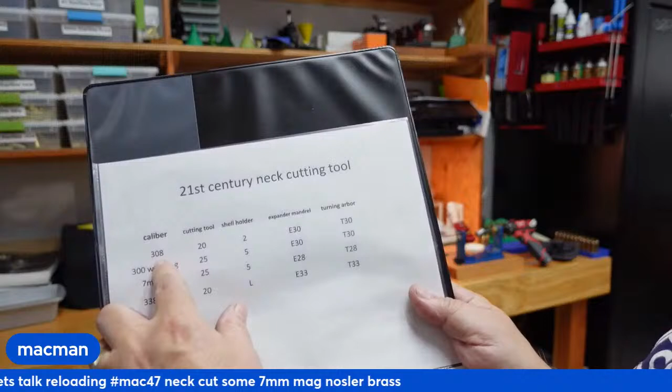From the 21st Century site, so I cut at the moment, I do 308, 300 Win Mag, 7mm Mag, and 338 Lapua. So the cutting tools, it's the same cutting tool for 338 and 308, so it's got the same angle, so I only need one cutting tool there.

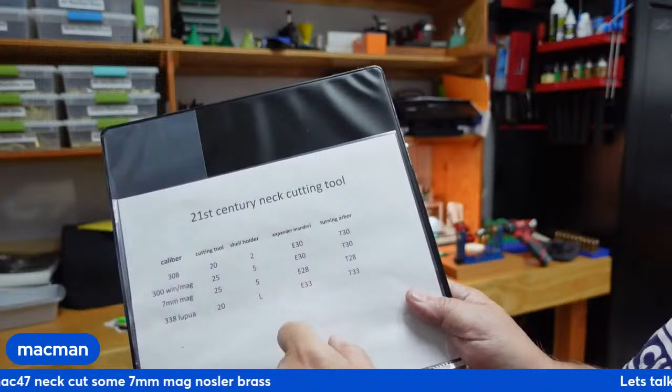And it's the same for 300 Win Mag and 7mm Mag, they use the 25 cutting tool. The shell holder, which is the chunky thing - so it's a number 2 for 308, a number 5 for 7mm and 300 Win Mag, and a large for the 338. Hopefully you can see that okay.

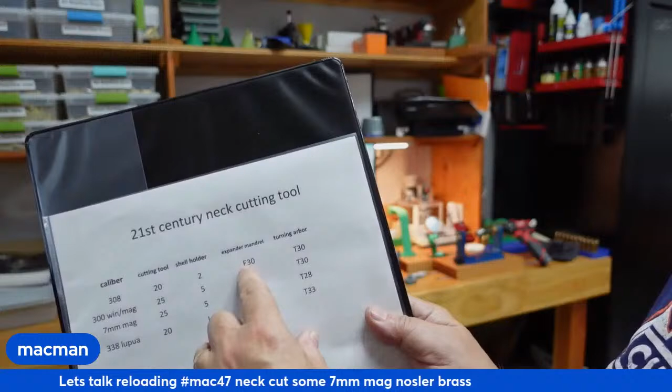So an expander mandrel - the expander mandrel is what we're going to push down inside the neck. What it does is it takes any roughness or any burrs off the inside of the brass, and it expands it to the exact size for the turning arbor. And you can see all the numbers match up, E30 for expander, T30 for turning arbor.

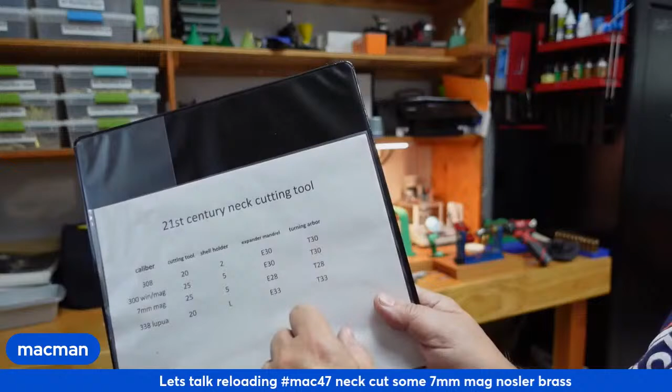So you need 2 arbors, one to go in the machine that it runs on and one to expand it out. So it's the 308 and 300 Win Mag, both 30 cal, so they're going to use the same mandrels and arbors. 7mm is 28 and 28, and obviously the 338 Lapua is a bigger one as well.

So because I'm only doing these sizes, I don't need too many parts, but I do like to keep it all on a bit of paper in a file, and it tells you exactly what you need. And then you can download the chart from the 21st Century website, which runs through all the calibers, and it tells you the cutting tool, shell holder, the driver, everything you're going to need. It tells you there with all the numbers, which I just keep for reference.

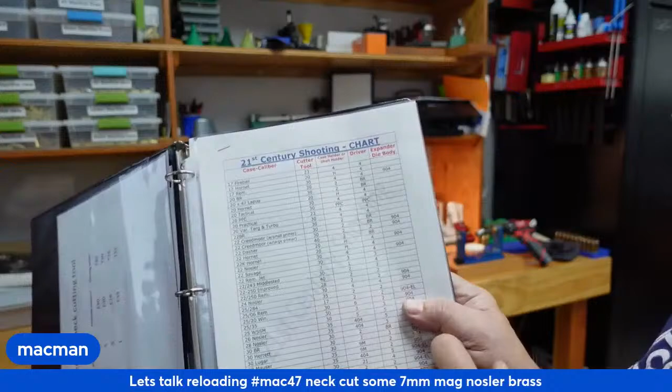So it's always good to keep the list of everything like that - saves going to the website every time.

So over here, you can see the turning lathe is set up. We've got the gauge back here for doing the run out, micrometer there, and I've got some pieces of brass ready to go. So we're going to go over onto the...

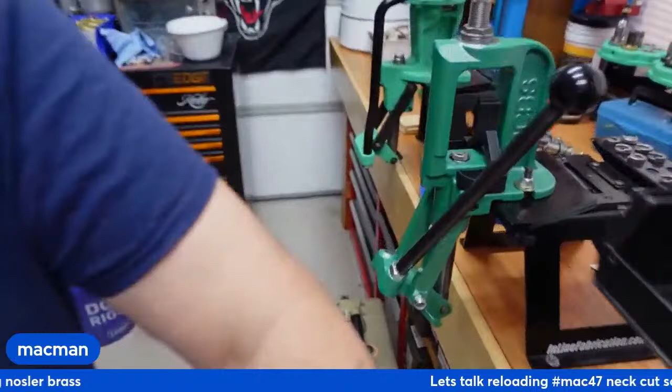RCBS first, because we're going to have to expand the necks and clean them up to make sure everything's good before we run them through the neck lathe.

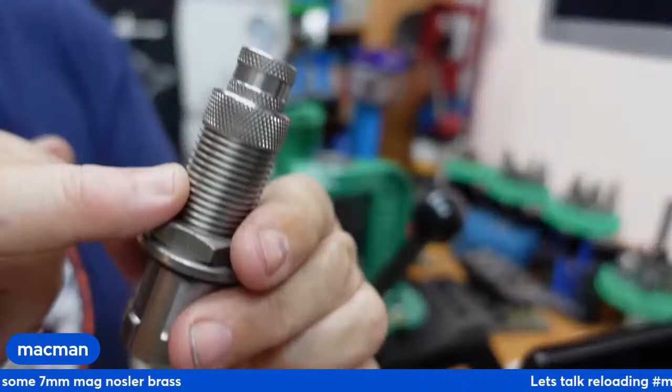So they come as like a die holder, which you can unscrew, and there is the actual expander mandrel. You can see on the back there.

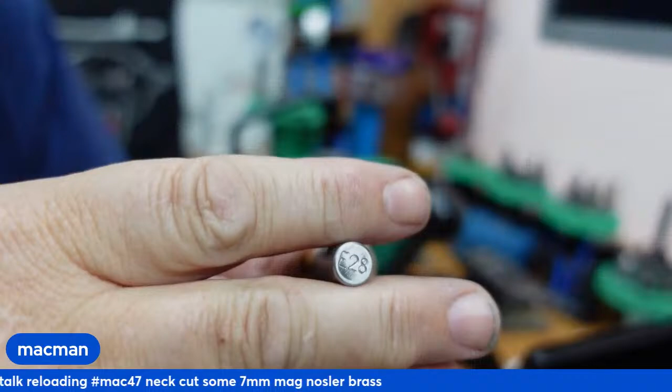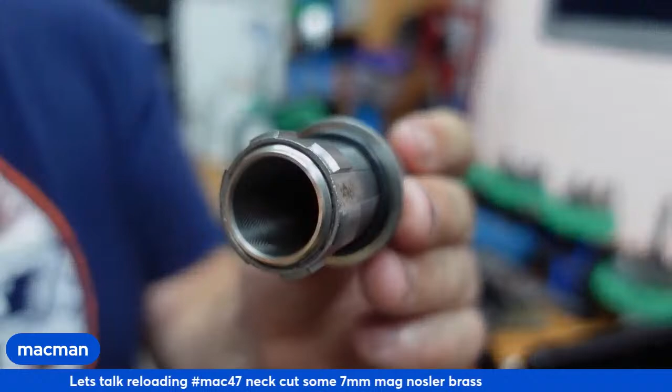Clean that off a bit. So E28, you can see that, they're not focusing very well. There you go, E28. So that's the expander mandrel for 7mm, and it just pops into the die. There's a little cap on the top, just locks it all up, and you can see it's deep in there. So this die is long enough to take the 7mm mag.

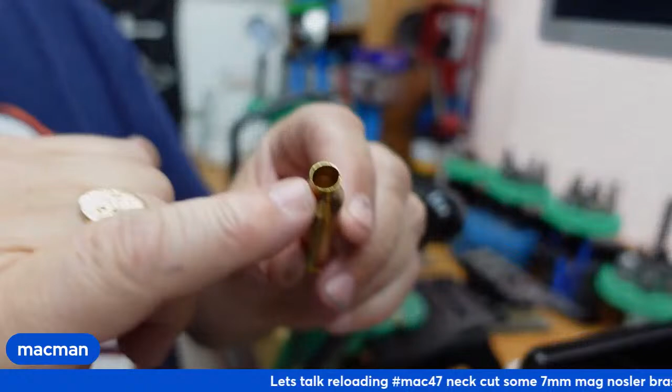So I just sit it in the die, and it's just as simple as grabbing a new piece of brass. Like I said, pop it in and just bring it up nice and slow onto the mandrel and just let it run through. And what that has done now is if there's any imperfections in the neck, it's taken them all out. It's made it perfectly round again. It's expanded it to the exact size we need for the turning arbor. And if there was any burrs or anything in there, it's taken them out. So it's just a matter of just go through and do a few.

So as it goes at the moment, before you expand them, that won't slide onto the turning arbor, and it won't go onto the run-out gauge as well. I tried putting one of these on the run-out gauge, and it just doesn't want to go in there. So you need to expand them before starting. It's just a matter of just running them through.

Get a few done, and then we can go over and do them. And what I normally do is, if I'm going to be doing 50 pieces of brass, which is the full box, I'd go through and I'd do all these in one go first before taking them over. And then this process is done and finished.

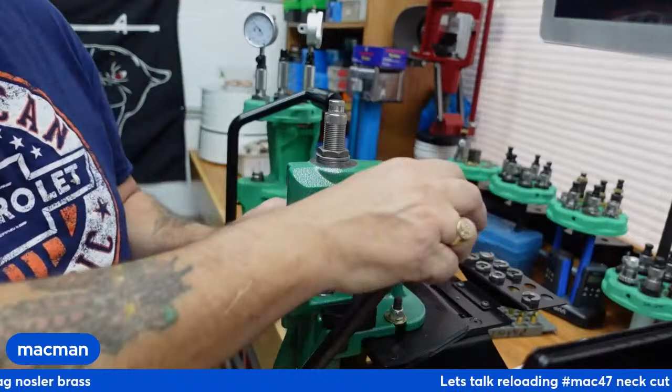Hopefully you can see that okay, guys. That one didn't go into the die. That one wasn't clipped in the shell holder correctly, so we just need to ease it out of the die.

You know me, guys, I always like to cause myself problems. Let's pull that down slowly. It's just a little bit up there on the die. Let's pull it out a bit more, and it should come down. There you go, so I hadn't clipped that straight in on there, and it was just sitting on top. Another one of my little mistakes. You can see you can just pull it straight out afterwards.

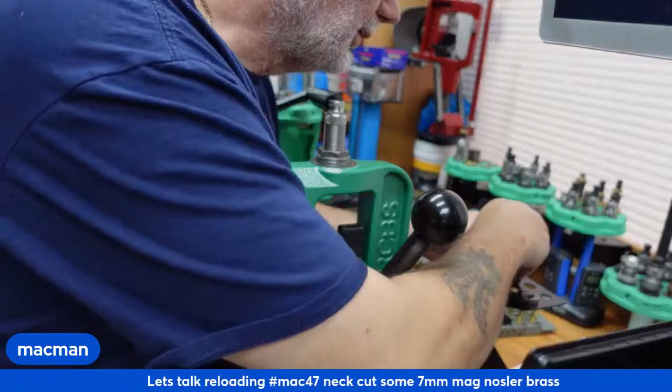So just sit it in the die. Am I using the correct die here? Is this? Maybe that's why we're having a problem. You just get the correct shell holder. I think that one's for a slightly bigger. There we go, that's a better fit.

Okay, we'll do a couple more and then we'll go over onto the lathe. Okay, I got 10 done there. I'm going to take it over.

Get this set up so you can see everything that I'm doing.

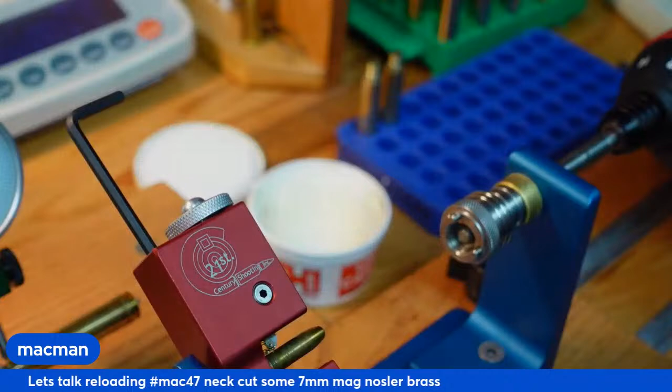So on that gauge, it's reading 15.5, and you can see that piece of brass, that one's pretty good, but I'm going to cut it anyway. Let's see if we got one which is a little bit worse off. There we are, so that one there is going from 15 to 16 on the run out. You can see it's only a thou run out. Hopefully you can see that bouncing, guys, from one to the other.

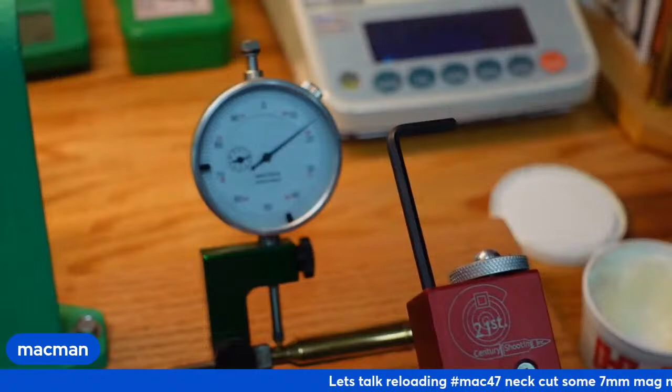Focusing in on that or not? It's catching this. Let me see if I can slide that up a little bit and turn that away from that a little bit. There you go.

So as we turn it, you can see it's running about a thou, maybe a thou over of run out.

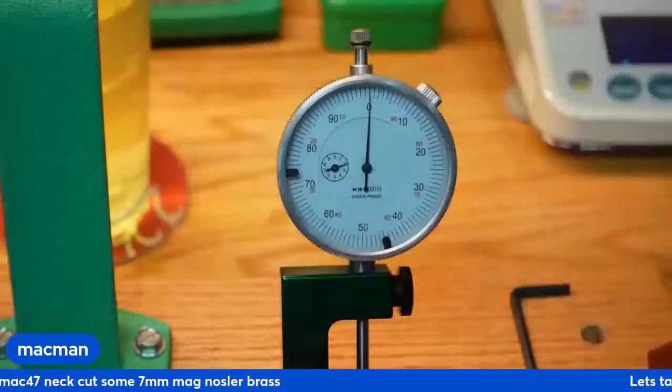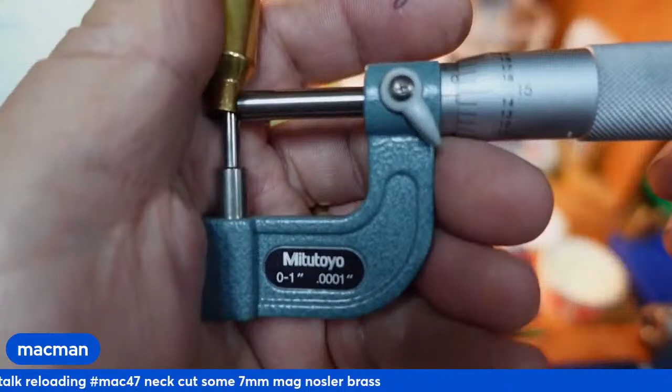So we're at just over 15 on that one, and then when we measure it with the gauge, hopefully you can see that it's 15 thou, which is normal for these pieces of brass. They're always around about 15 or just over 15 thou. You can see it's smack on 15 there.

Turn it a little bit more. A little bit under 15 there. So we normally take them back to about 14 thou.

So what we're going to do, when your neck turn in, you want to come down the neck and just to touch the shoulder. You don't want to be hitting it too hard, just enough so it's coming down and making a smooth contact through the whole neck and just onto the shoulder. You don't want to start cutting into that shoulder too much.

So it just goes in like that, tighten it up. You just get a little bit of lube, doesn't need a lot, and we just put a little bit onto the turning arbor. That'll help everything go through.

So if I try and zoom in on this, hopefully you'll be able to see it a bit better. Okay, so I use the electric gun on it, you start it up, and you're trying to keep it at a smooth pace all the way through. So you want to bring it just up onto the turning arbor.

Nice and slow through, and then till it stops, it actually hits the stop, and you can bring it back. And then you're basically going to go in and check it.

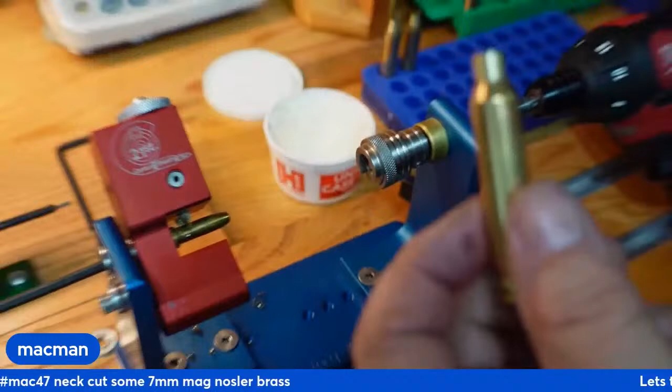And if you can see, let me zoom out so it focuses. So if you can see, it's done a really nice job cutting it down, but we're falling just a little bit short. It's not quite coming. I can just feel a little ridge there. It's not quite coming down onto the shoulder.

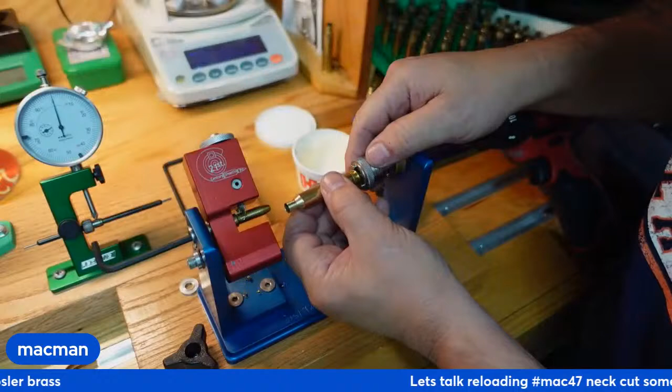So we put it back in, and it's as easy as all I do. You've got a locking Allen key here. You've got like a little threaded bolt on the back here, which this pushes up against. So all I'm going to do is I can just keep a little bit of pressure on the arbor, loosen the actual lock nut that comes down through here to hold the arbor in place.

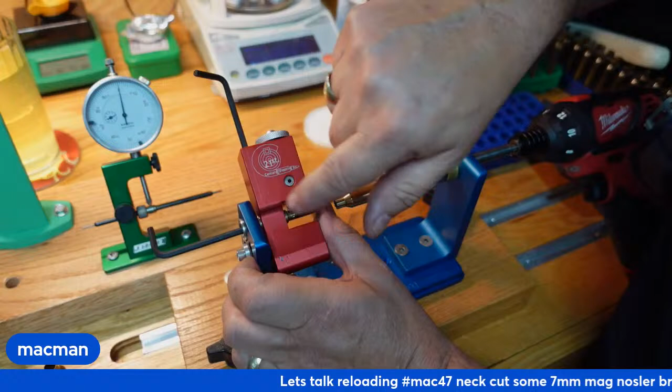And then with this Allen key here, so we're not going in far enough, so we need to turn it anti-clockwise. What we're going to do is with the Allen key here, we're just going to turn it maybe a quarter of a turn, keeping pressure on this, so this turning arbor falls back in, and all we do is we just nip up that locking bolt again, touch of lube, and then we run it through exactly the same again.

Till it stops, and then bring it back, do it, give it a wipe. So it's gone down a little bit further, but still it needs a little bit more.

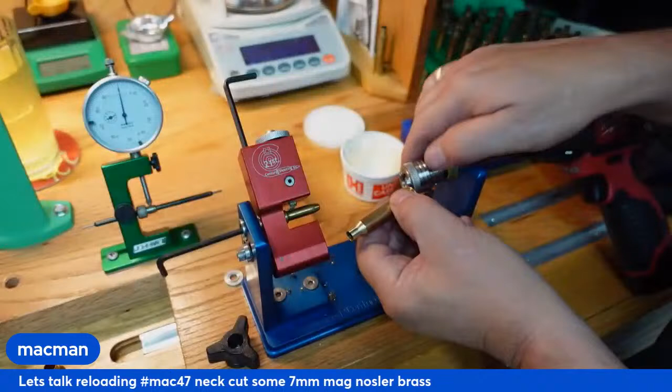So we can put it back in, lock it back up, and the process again: keep pressure on the turning arbor, loosen it, turn this back just a touch, tighten it back up, put that back in there, and then the process again.

And once you've done this and it's set up to where it needs to be, you won't need to adjust the depth of this, because it's going to always come across the same, since all these pieces of brass are the same. And then it's the same with, if I wanted to go deeper to cut more off or to take less off, there's a lock screw there. I undo that screw, and then there's a turn-in nut on the top, which pushes the cut in and out.

So this is set already. I don't want to adjust that at the moment. So we've done that one again. Put a little bit of lube back on there, and then run it through again.

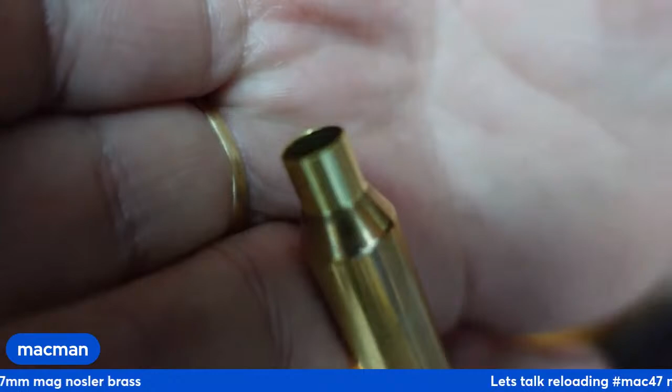Wipe. We're just about there, let me just check. It's coming down onto the neck - if you look, you can just see the shiny bit on the shoulder. It's just coming down onto the shoulder now, and we're just kissing it. It doesn't need to go much further because we've neck turned it all the way down. You can see it's a little bit heavier on that side, on the shoulder, right in the join there, and as we turn it, it gets a little bit less. It's just the different shape of the brass. So that's perfect, it's just kissing the shoulder.

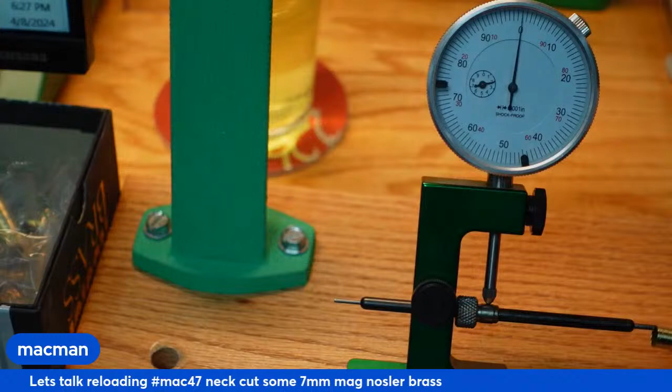Now if we turn this, what I'll do next is zoom back in on this gauge. We can pop it in there. You can see straight away it's just under the 15 now, so like 14.5.

As we turn this gently, you can see that lever, the little pin moving - it's moving about half a thou, about half a thou on that one. So you've taken it from a thou to like half a thou. So it's not a lot. This brass is pretty decent brass.

But sometimes you'll get one where you might have 2 thou run out and you can almost take it down to nothing. And when we measure, you can see it's coming down and we're on 14 thou on the line. Turn it around a little bit more - we're at 14 thou, 14 thou all the way around. So you know the setup is right, and then we can just go through.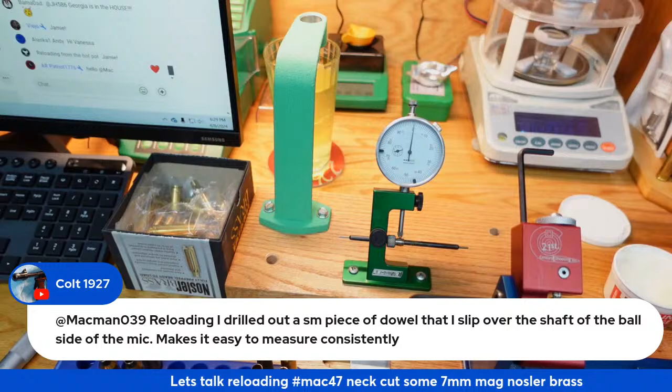Colt says: I drilled out a small piece of dowel and slipped it over the shaft of the ball side of the mic, makes it easier to measure consistently. Yeah, that's a good idea, just to stop so the brass goes to one place, you're measuring it all in one place. That's a good idea, I might do that.

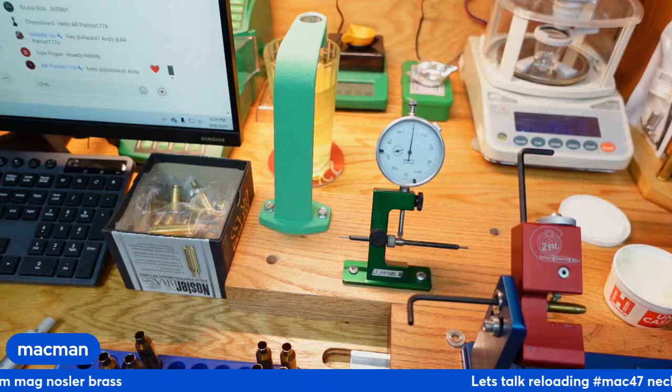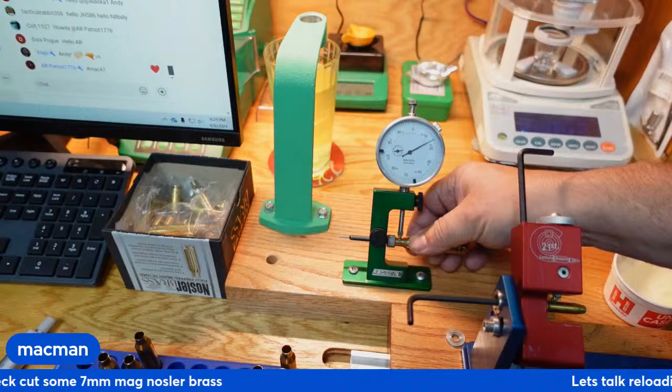Okay, let's go in and get another one done. Let's see if we can find one with a little bit more run out. It's about a thou. You can see on this gauge, this brass is pretty decent, some of it's only got half a thou run out. There you are, that's a thou run out - that one's running a thou run out from 15 to 16.

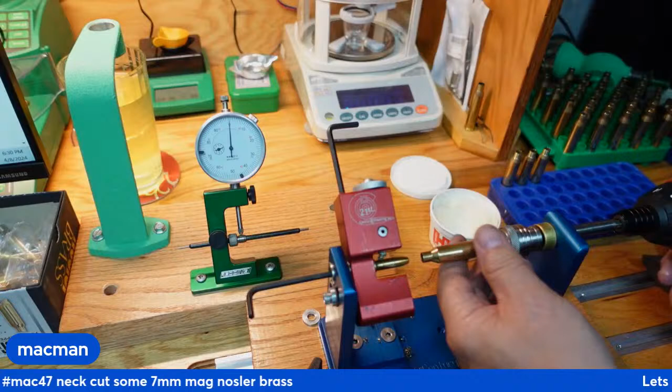So we can set it up, and you only need to do this once. Once you've cut the necks, they're good to go. You can keep annealing and resizing and doing everything with them. You don't need to - it's just the initial, when they're new or the first thing, you just need to cut them once. So hopefully it's gone there.

Wipe, and there you can see a nice clean cut. The slower you do this, the less you can see. The last one I did it a little bit quicker and you could see some lines on it. This one I ran through a little bit slower and you can see it's a lot cleaner.

And sometimes you might have a little ding in the brass, and when you cut in, it doesn't cut that part because there's a little ding or something in it. You don't need to worry about that, you don't need to keep cutting and cutting until you get rid of a mark. Sometimes you'll have a little mark that just doesn't quite clean all the way down - that'll fire out when you shoot it. You're just trying to get as much consistency, so if you've got one little ding where it hasn't cut it, don't worry about it.

And you can see there, it's just come down, just kissing that shoulder there. So if we put that over on the gauge - again, it's just under 15 thou, and all you want to do is turn it nice and slow.

And we've got maybe half a thou run out, and go back onto the... so we're at about 14. Hopefully my focus is in, sorry guys. Zoom out, it doesn't like to focus when it's on a zoom. So you can see there we're at 14 thou. As we're working it around, it's taken about a thou off, down from just over 15 thou to 14 thou, and it's taken a little bit more of the run out off.

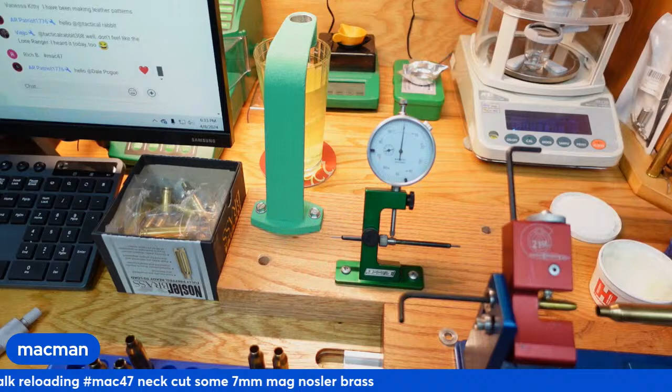Like I said, this brass is pretty good, it's not over. This is why I went with this Nosler brass for my 7mm, because it's good brass, it doesn't need a lot of work neck turning. And then I use Lapua brass for my 308 and my 338 Lapua. For my 300 Win Mag, I've got Norma brass. So it's all nice quality brass, and you can get good consistency out of it.

You just want to keep clearing there. You can see how fine the brass is coming off, it's just a little thin clump of it, but just keep cleaning it off the cutting blade. It doesn't cause any problems, it just makes it easier for you to see when you clean it off.

And there you go. Really nice neck turn on it, kiss the shoulder, nice and slow on the turn. And like I said, it's taken it, it was pretty good anyway. We were at a thou run out.

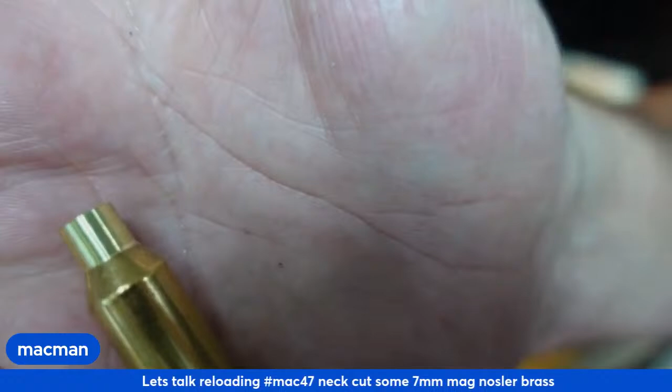Just a nice slow pass. With this one now, you can see it's a nice cut, but as I turn the brass, see how much has gone onto the shoulder there? It's cut down a little bit. That's just showing that it was out of shape a little bit. So you can see from that side it hasn't touched the shoulder hardly at all.

And as we turn it, you can see that shiny bit coming down the shoulder. So you do get that, and it's not an issue, it's not a problem because you're turning it, you're coming down. It's just the brass might be off a little bit, but now you've cleaned it all up. So you've done a nice cut down here and a nice cut on the shoulder, so that's going to be perfect. When you go to chamber that, you're going to get super consistency with it.

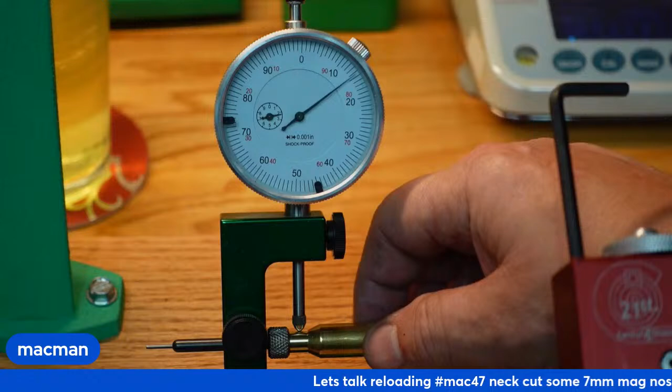And then if I turn that now, there you go, it's about 14. As it turns, just nice and gently turning it, you can see it's gone from 1.5 thou to probably half a thou. And there you go.

Neck turning the brass. If there's any questions guys, let me just go in and see if there's anything you want me to run over again.

Let's have a look, I think DJ Play Nice has joined us. Good to see you. Elliot, AR Patriot Nation is out there, good to see you, thanks for joining us. And let's see if there's any other.

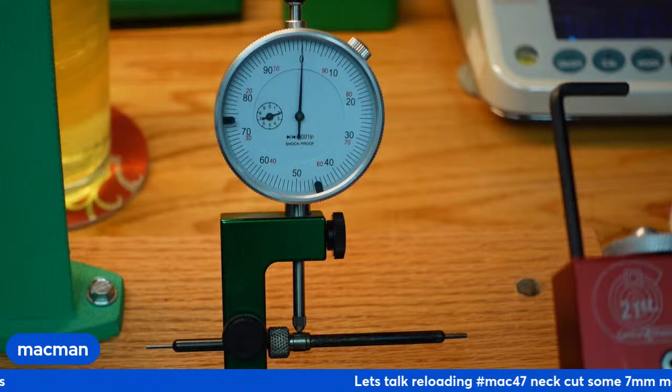Jamie says, I think the thicker you can keep the brass, the better off you're going to be in the long run, it's critical to get it even all the way through. Yeah, that's why I don't take a lot off, Jamie. We're literally taking 1 thou off. Sometimes you can get away with taking a little bit less, but with that thou we've still got 14.5 thou of brass left, which is still thicker than some brass you buy.

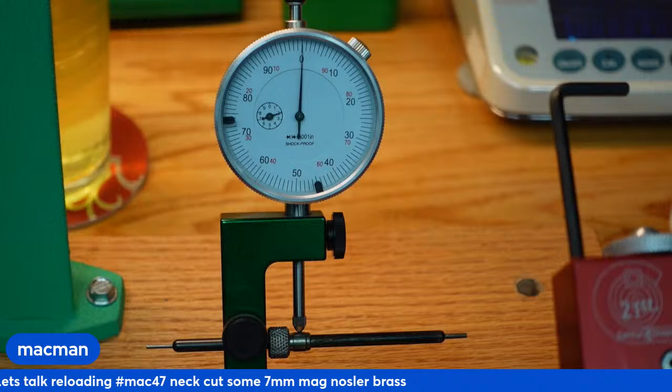I've seen some 308 brass down as far as 13.5 thou at new. You have to take it down a little bit, so 14 thou, there's still plenty of meat left in that neck. We're just tidying it up. Great comment, understand, but however much I'm taking off, I've never had an issue. I do all my precision stuff, 308s, 7mm, 300 Win Mag, and 338. I neck turn them all, and I think the most fire-ins I've had, I'm up to 4 fire-ins on a 300 Win Mag, which gets pretty hot, and I haven't had any split or any issues yet.

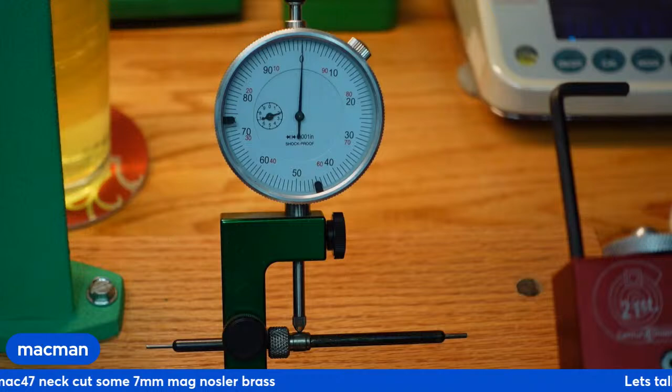Jamie said he thinks 12 thou is as thin as he'd want to go. It's not very often you need to go down to 12 thou. You can see this, Jamie, these are starting off at 15.5, and we're taking them down to 14.

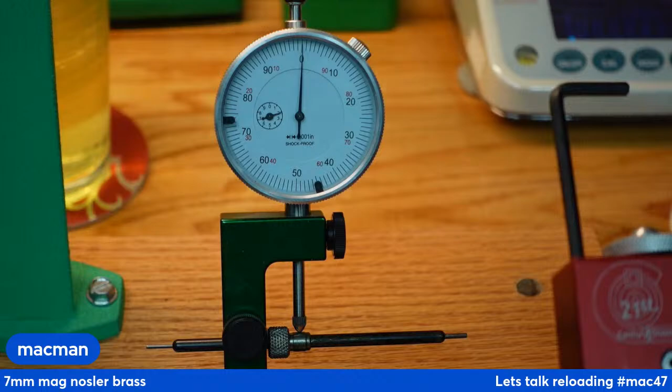Let me get my other book with my data in it, just to show you these data things, guys. You can see here, 338 with Starline brass started off at 15.5 thou, and when I finished it, it was at 14 thou. So we're hitting that 14 thou mark.

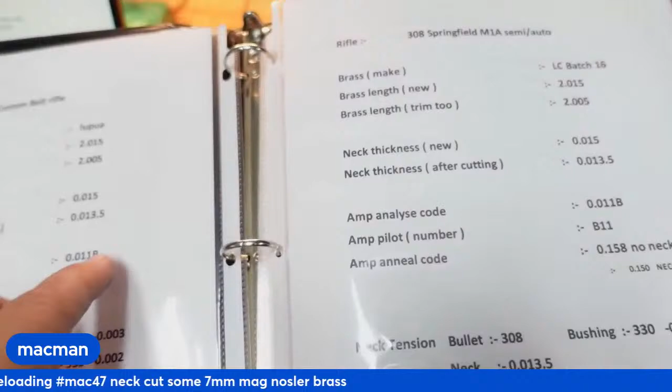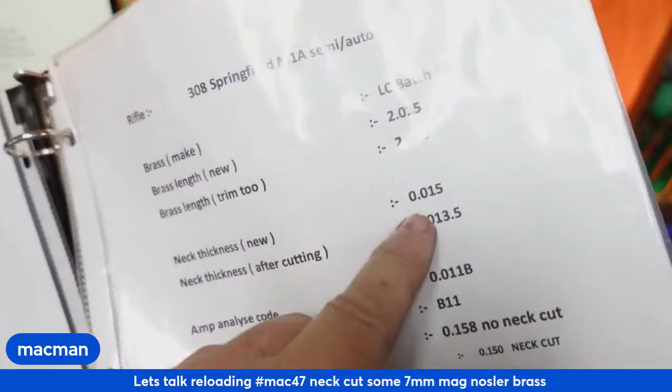Then I had some Lapua brass in 308, and they were 15, and that needed a little bit more, it went down to 13.5 thou. That just needed a little bit more to cut it, but there's still plenty of meat there. And again, I've got some Lake City brass that I did, started off at 15 thou, took it down to 13.5 on Lake City brass.

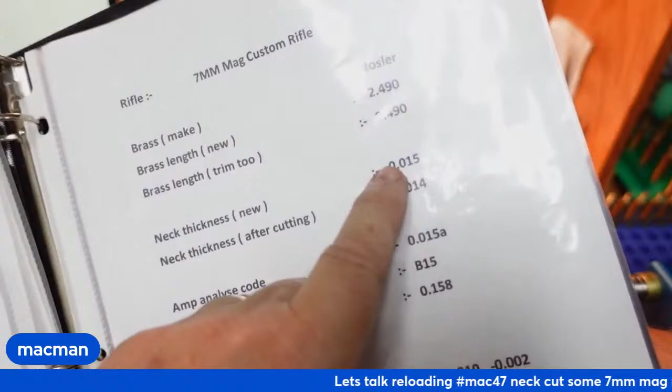RP brass, new for my AR10, was actually starting at 14 thou. We took a thou off and brought it down to 13, so we're still plenty of meat. And there you can see the 7mm mags, we're doing 15 down to 14, which we're doing here. And then the same with a 338 Lapua, starts off at 15 and we're taking it down to 14.

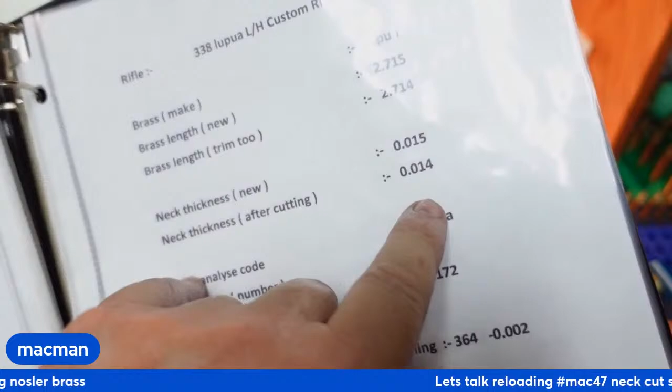So this machine is pretty decent, it does a really nice job, and you can limit how much you're cutting off. You can just do a little bit at a time, because this control knob on the top, you can turn it in and out once you've taken the lock screw out. You can take it in and out, and you can do basically a quarter of a thou cut each time, because you can just turn this a touch, and get down to a quarter of a thou cut.

Colt 1927 is asking, can your lathe be set up for inside turning? Simple question, I don't know. I've never turned the inside of a neck, and I'll be honest, I've never really looked at it, whether it's something we need to do. I don't know if this machine will be able to do it, because obviously it's got the cutter on the outside, it just sits on the outside. I wouldn't know, I'll look into it, but I don't know. The benefit I get from doing the outside is quite a lot, cutting the inside, I don't know. I've never looked into it, so it's something I'm gonna have to maybe do a bit of research, and I'll get back to you on it.

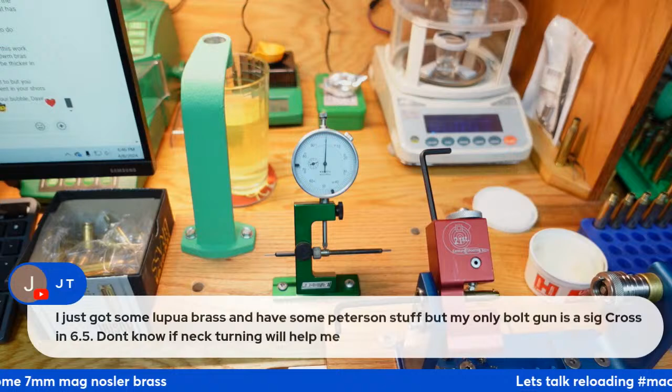I just got some Lapua brass and I have some Peterson stuff, but my only bolt gun is a Sig Cross in 6.5. Don't know if neck turning will help me. It's down to everything - you can neck turn, you can neck size, you can bump shoulders. It's doing the whole package to try and get your group size down and be more precise. Neck turning, you could probably get away with just doing that, you wouldn't have to do anything else. Everything you do to your brass, to make it more consistent so each piece is almost exactly the same, is always going to give you more precision and better group sizes. So every little bit you do gives you a little bit more. If you just neck size, it'll probably bring your group size down a little. If you go further and do more, you can get your group sizes down quite a bit.

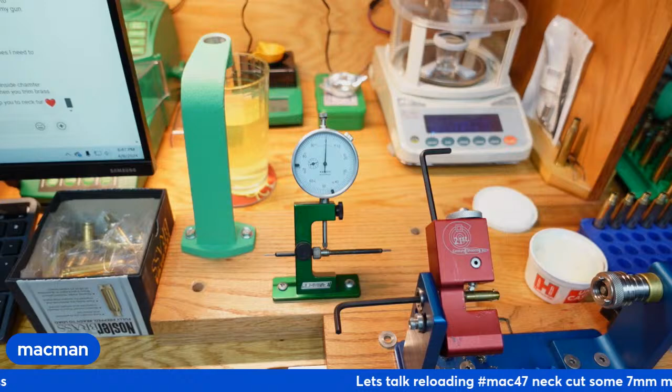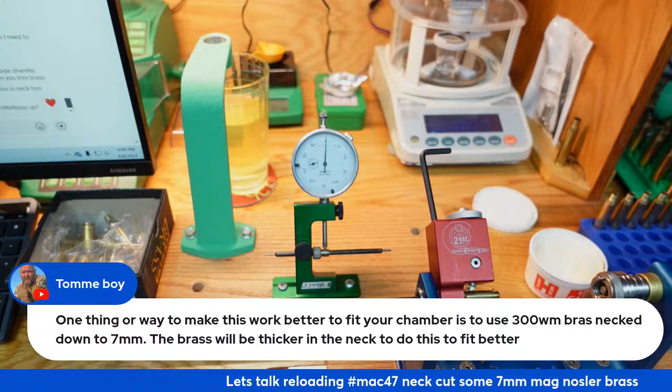Tomme Boy's saying one way to make this work better is to fit your chambers to use 300 Win Mag brass, necked down to 7mm. The brass will be thicker in the neck to fit better. So you're talking sizing down 300 Win Mag brass into 7mm brass. Interesting.

Just checking to see if there's anything else.

Tomme also says use sized 308 brass down to 243, then turn them to fit the chamber in my gun. You do a lot more experimental stuff than what I do, Tomme, so it's always good to hear. I love hearing the little things that you do.

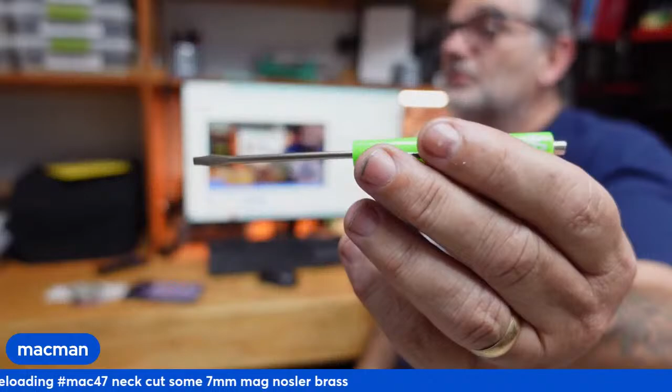Colt says, gotta say that's a really nice turning lathe. Yeah, I watched a few different videos on different types of lathes and stuff, and I just got drawn to this one. It was the way it worked, the way it got set up and everything - I really liked it, so that's the one I went with.

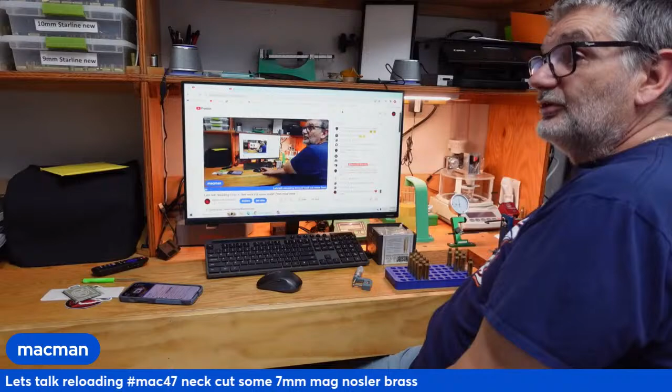There's other ones out there which are a little less expensive. But what's nice with this one is you can run it set up with a little Milwaukee screw gun on it, like you see there - it works fine. But 21st Century actually makes a motor that mounts on the back with a little lever you push forward and backwards, sticking out the front, so you can have it all set up with the 21st Century stuff. But it's about, I'm trying to think, maybe $200 to $300 for that motor setup and lever mechanism, so it puts quite a bit of money on top of the lathe.

Where I am at the moment, all my 338 has been neck sized, all my 308 has been done. I just happen to have a box of this 7mm, it's Nosler brass that was sitting up there, so I was getting ready to prep. Once this is done, I think the only thing I've got left to prep would be one batch of Norma brass up there. Because once you've done it once, you don't need to do it again - it's only when you've shot out your brass and buy another batch that you'll run through and do it all again.

So at the very start, it might have been worth me buying the motor, but now it doesn't make sense, because I'm only doing probably 50 to 100 rounds maybe every few months, or every 6 months or a year, whenever I shoot my brass out and start a new batch - I'll go through and do it all again. If it was something we were neck turning all the time, it'd be worth buying that motor, but as it is, I'm not going to get the benefit from it.

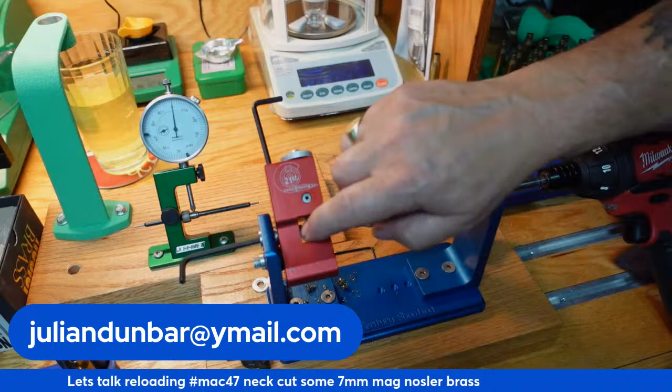Let me see if I can zoom right in so you can see it cut in. Not quite in focus - that's better. Okay, so I'll run this through and you can see it. Hopefully you'll be able to watch it cutting all the way through.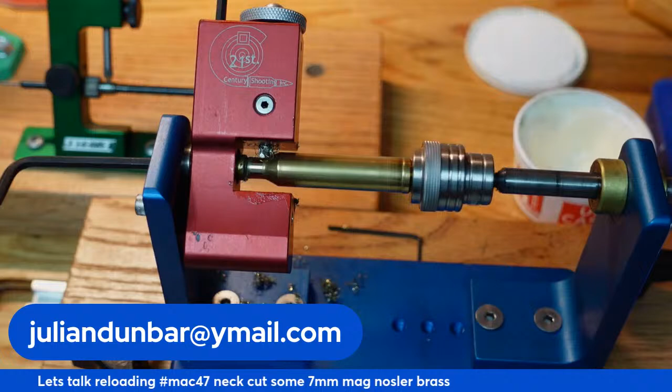So turning it at a decent speed so you get a nice clean cut, but trying to move that as slow as you can to get a nice cut on it. And you can see there how clean that cut is. And you can see again that one has got a bit of a cut into the shoulder more than the outside, just a little bit off the shape. And then we can put it into the gauge.

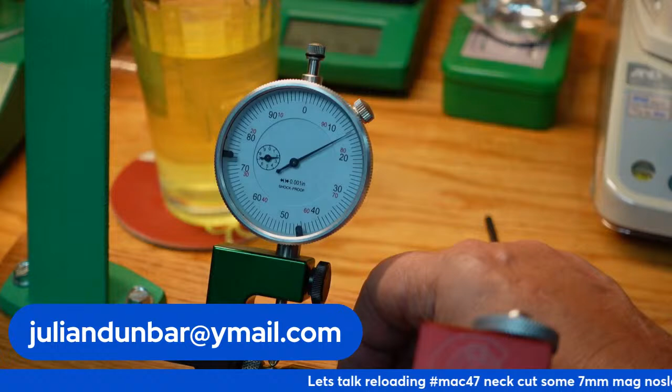Let me see if I can zoom in on that one. So this one had hardly any run-out when we did it, probably just a touch under a thou. So as I turn that, you can see that needle is practically not moving off that pin. So even though there wasn't much run-out, it's improved that piece of brass - it's taken more out.

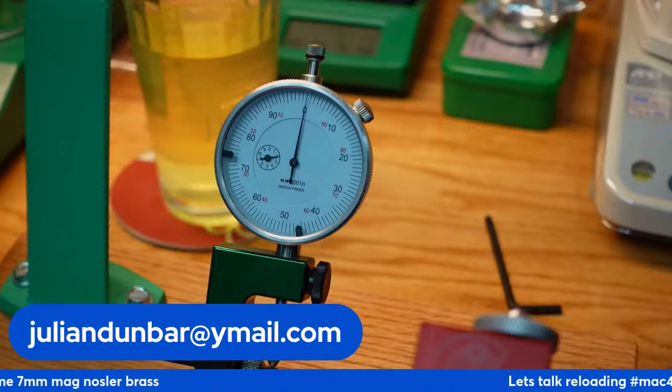And once you set everything up, you can see you can get through and get this done. Nice cut all the way around. And then we pop it on the gauge. You can see it's one little kick there, but it's improved it up nice.

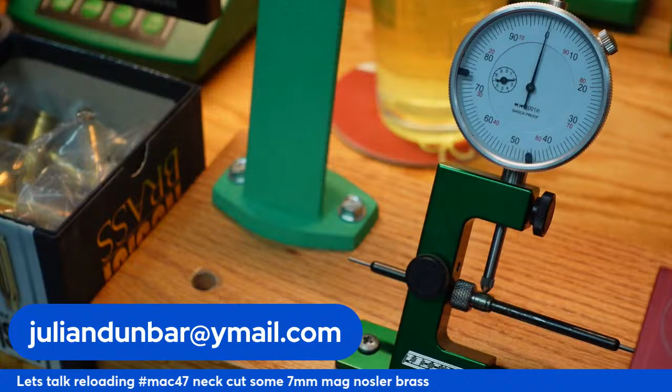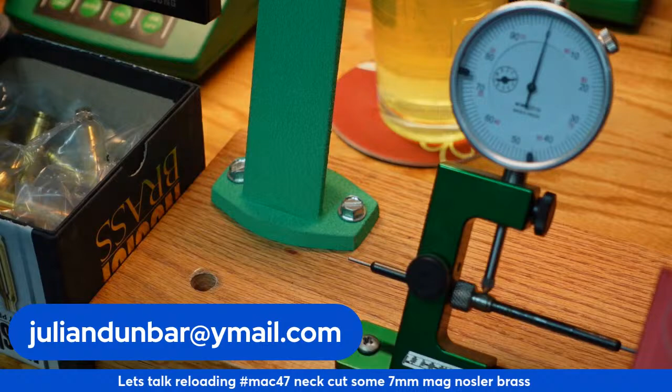And there you go, and that's basically it, guys. We'll just run one more through while you're here, and then we can call it a wrap. Let's bring this round so you can see the cutter again.

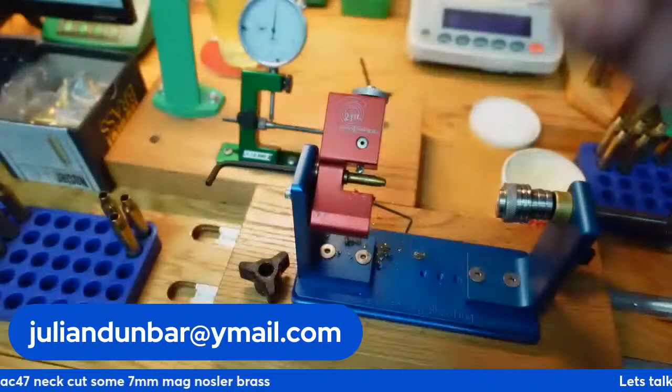And I really enjoy neck cutting. As you say, it's pretty therapeutic. You can get a really nice result, when you can see the job it does, each case comes out really nice, just touching that shoulder. Once you get it all set up and you're getting it right, it does such a nice cut, it's really good.

Half a thou run out. So there you go, neck cutting, some 7mm new brass, some Nosler new brass. So we took it, like I said, down from 15 and a half thou, just touching 14 thou. It's made it all consistent and ready to go. Over the next week or so, I'll go through and do the whole box, get it all done, and that'll be good to go.